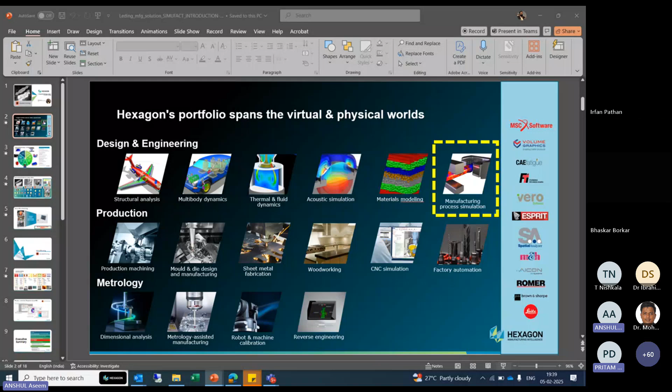I'd like to share my screen. Team, just let me know if you can see my screen. Hello, anyone from organization? We can see your screen, please continue. Okay, no issue.

Okay, perfect. So here, as I mentioned, when it comes to Hexagon, we cater to industry in multiple ways. Either it could be in terms of design and engineering solutions where we enable our industry experts in establishing virtual prototyping for different processes, like structural analysis.

We have a solution called MSC Nastran. The Nastran word came from NASA, as they predominantly use our Nastran code to simulate structural load variation and so on. Similarly, for multi-body dynamics, we have a code called Adams solution. So we provide our end users a way to evaluate multi-body dynamics situations, and for that we have a code called Adams.

Similarly, for CFD simulations, we have a code called Cradle, which is historically a Japanese solution, and now it's acquired by Hexagon. I would say the entire Japanese industry is using Cradle for their CFD applications. In India also, we have a very strong customer base where various organizations use Cradle to simulate their flow dynamics. Similarly, for acoustic simulation, like NVH parameters and all, we have a code called Actran. Users are using Actran to figure out the NVH parameters of automobiles. So industries like Tata Motors, Mahindra, or any OE are using our code to simulate the acoustic situation.

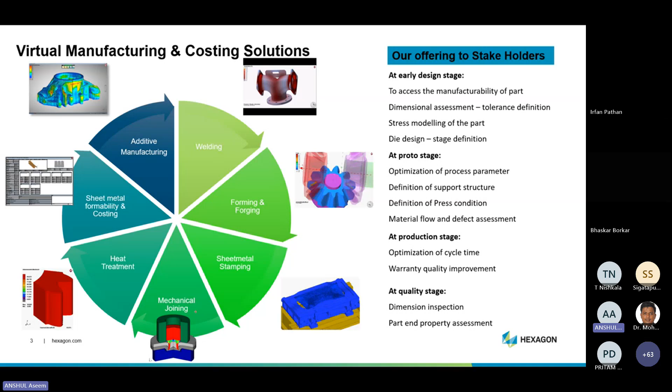So this is how it works. This is how we cater to our industry and offer support to our industry. I hope this has given a rough idea of the role of virtual simulation in this industry. So now coming back to what we offer to manufacturing experts and to the organization, can you just add those guys in?

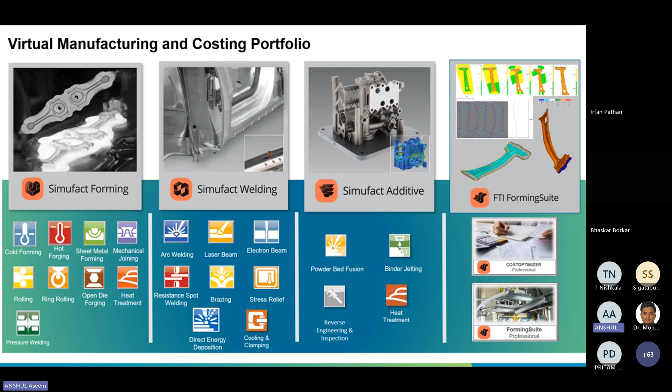This is how we align our engagements with the industry. For today's session, I will start with Simufact Additive and end with Simufact Forming. In between, if you have any queries, just let me know. So on this note, I would like to start with Simufact Additive, where we talk about solutions for the additive manufacturing industry.

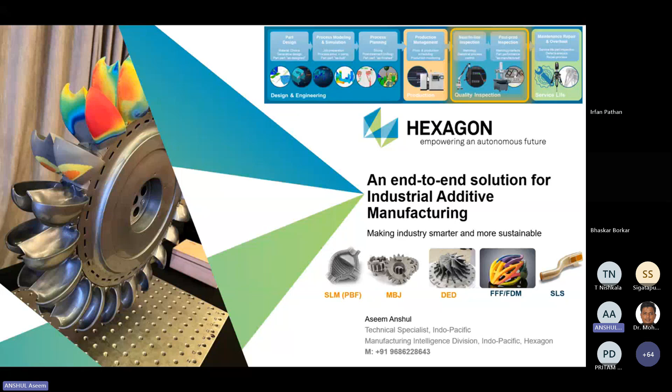For FDM and SLS, we have a solution, Digimat Additive Manufacturing, where you can get into the plastic printing process and so on. So this is how we have oriented ourselves. Now, to start with the case study of what we are doing here.

I'd like to bring a case study for Hero Motocorp, what we have engaged with those guys. So here the process starts with that at Hero Motocorp, they identified what could be a component for the additive manufacturing process. For example, they pointed out, let's print this particular component. The thought process was that this component has some X amount of weight in a vehicle when it is manufactured from a conventional manufacturing process. Could be casting, could be forging, whatsoever the process. In this case, the conventional component was casted.

Then their team worked to figure out what could be the optimum design for this particular component, which means that they ran our solution for design for additive manufacturing. They optimized the design parameters in terms of weight reduction and all those things. And once they had an idea, let's reduce the weight of this component by 50% with a particular design, with the help of additive manufacturing process simulation, they ensured that this can be printed effortlessly with the minimum of scrap.

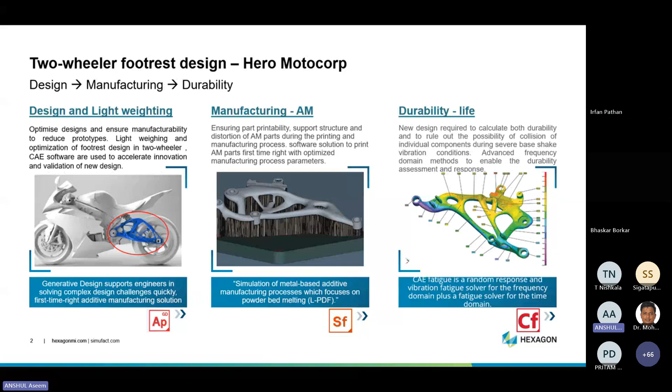So this is a wholesome story which an end user can percolate with the Hexagon solution. Either on the design side, selecting a conventional component and then optimizing the weight for that. Then moving towards the manufacturing of that particular component, what should be the ideal way to manufacture that component, and meantime, meeting the quality requirements. So this is how we work and we respond to that.

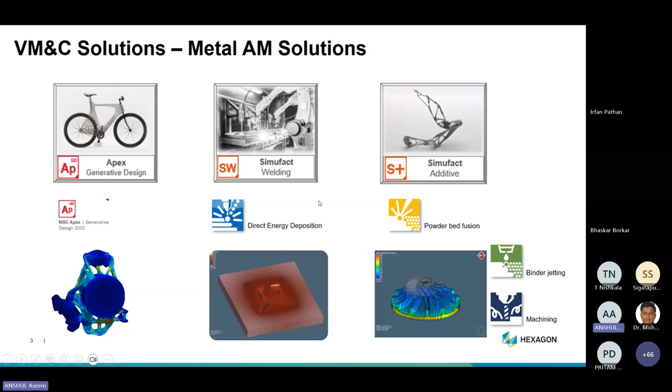So now we have different modules to study those 3 line items. One is Apex GD, generative design, which will help the end user to optimize the design of a particular component. Simufact Welding, where one can do the DED simulation, and then comes the powder bed fusion simulation. So this is something we can do. Now I will start with the generative design.

So you can see that on the right-hand side, we are going to start with a conventional component in this particular generative design software. Probably tomorrow you are working as a consultant to a particular industry. We will consider a particular component and how to start designing for that. So here Apex generative design software will help us to do a weight reduction for that.

So now you can see we are running generative design in the background, and in the software we will assign that we are looking to do a weight reduction by 50%, 60% and 70%, and depending upon the requirement for the weight reduction, the solution will provide you an alternative design concept. And now you can take this design concept, make sure what is going to be the manufacturing process for it with the printing simulation, and then finally you will ensure with manufacturing stresses whether it will sustain the required performance or not.

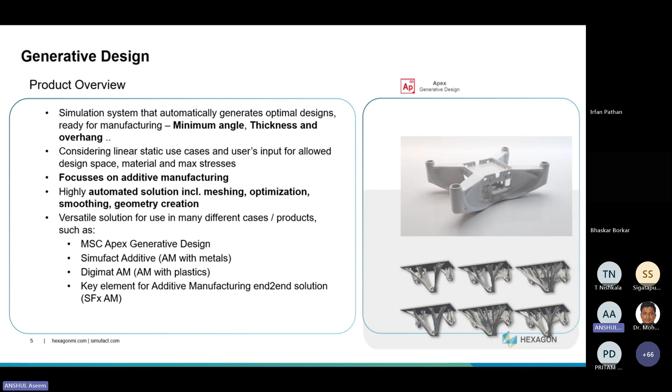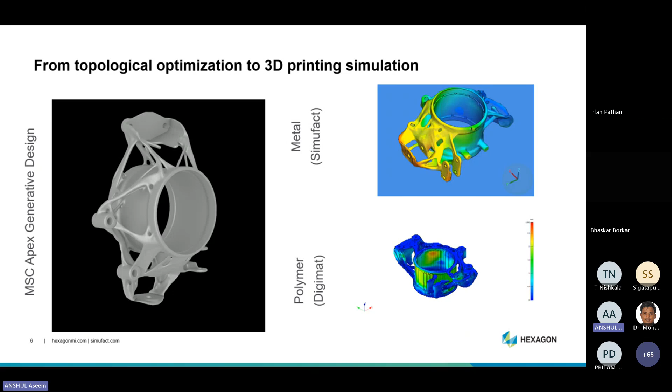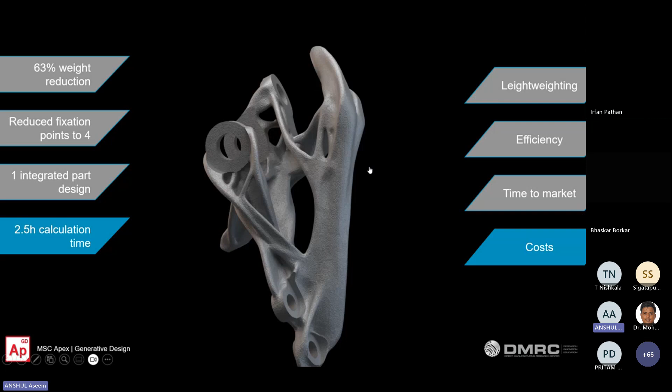So this is how we are aligned in terms of optimizing the design to the performance. Sorry for the abrupt orientation, but you can see that we are starting with a conventional design and we are ending at this particular point. Then you can simulate the process, figure out the stresses and the distortions, and then you will come with the right design, right manufacturing processes, and so on. So what we can achieve with the link-up of the solution: weight reduction, fixation points, efficiency of the printing, the cost of the printing.

Just give me a minute. My power is going off for the laptop. Just give me.

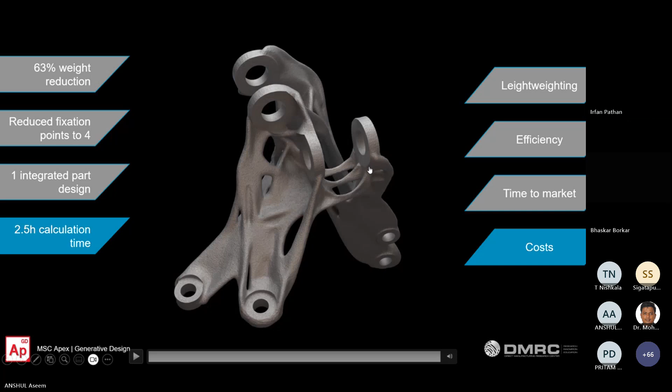So yeah, this is something which is very much exciting nowadays, and there are researchers who are going to be hired by industry in this particular line. So yes, this is all you can explore with this.

Now on the simulation side, I will start with some processes. Just give me a minute. Meantime, please feel free to drop your... yeah. So I'm resharing my screen. Okay.

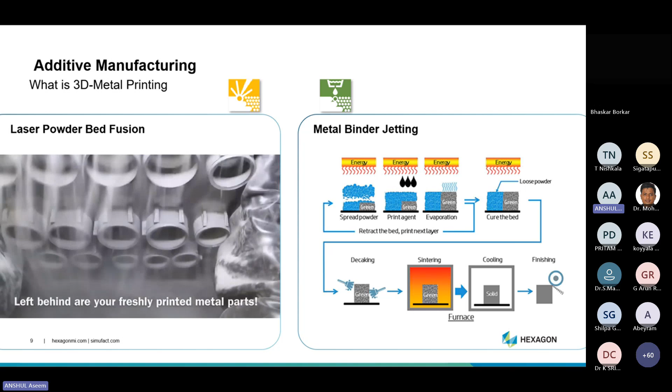So yeah, we'll start with laser powder bed fusion. So currently you can see the printing process, what we have in reality. You can see the recoater is moving with the laser, doing the printing operation. And again, the reprinting, and finally you have the components which are going to be removed. And then you can see this is the process in reality, and the same thing we replicate when it comes to the simulation.

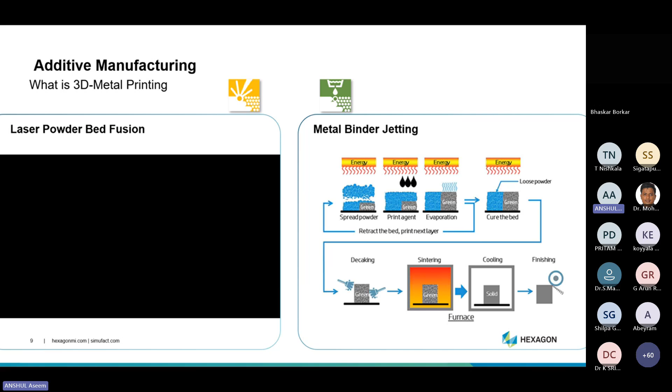Similarly, for metal binder jetting also, we have different processes. Here we have a very hot spot coming from the sintering. So what should be the sintering process parameters and all those things we need to simulate here. So yes, these are interesting workflows which can be simulated here.

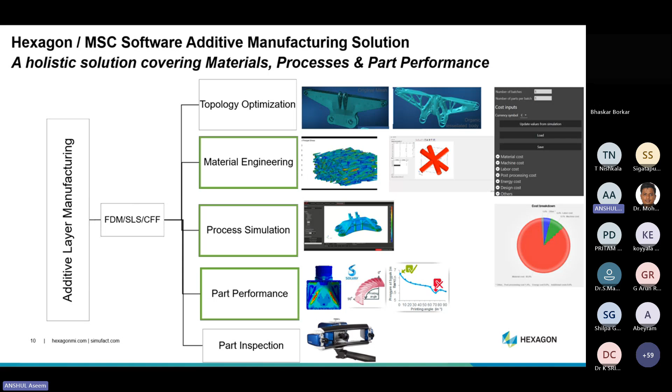So here, sorry, I was able to hear something. Any doubts? Anyone having? Okay.

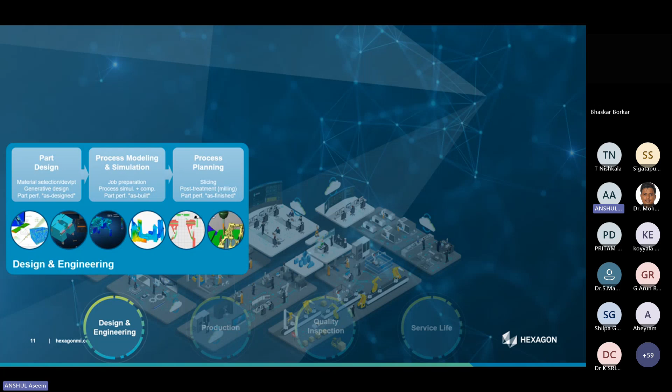Similarly, now as a user, when you move towards the next step, we are going to talk about the type of process, whether job preparation is right, whether the planning is right or not. These things we can figure out with the help of our virtual simulation from Simufact. Then as I mentioned, we have tie-ups with machine manufacturers, could be EOS, could be SLM Solutions or others. So we can connect you to the right guys and you can establish your lab and all.

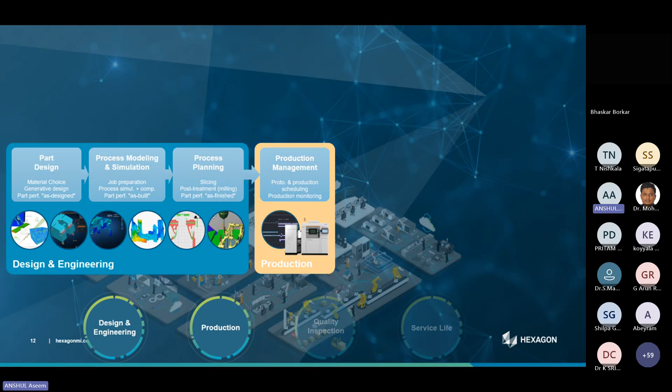Then once your real-time printing is established, it comes to the quality inspection, whether the part which is printed is right or wrong, whether it is correctly printed or not. So these things can be studied with the help of our solution. Then it comes to,

Just a minute, guys. Am I audible? Can you just confirm? Yeah, you're audible, sir. Please continue.

Okay, and then with the help of our Hexagon metrology solution, you can do such inspection and all. We can help you establish your metrology lab as well, the required CMM machines and all.

Just a minute. Actually, I'm at a public place, so you might be getting some noise from the background.

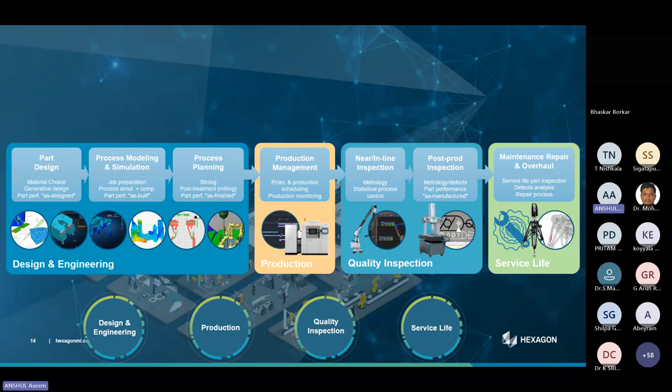Yeah. So here then comes the service life also. You can do service life analysis. We have seen CAE fatigue and all those kinds of engagements. So just to give you a rough overview of what we can do here.

So the rough overview is you can start with a conventional component and then you can work on the different candidates for the design. You can go for the performance analysis. Then you can go for the printing analysis. And again, with the manufacturing stresses, you can print the component. You can assure things and then move forward. So the point we want to highlight here for your notice is this particular part consolidation.

We are starting with this particular component and we are ending with this particular component. Just imagine the amount of weight you are going to help your team reduce, and eventually you are going to be a consumer for that component, or a vehicle. So you see that the moment you reduce the weight of the assembly, you help your organization make the vehicle more efficient, fuel efficient, with lower carbon emissions. So those objectives, what the modern-day industry is looking for, we can help them work on that particular line item. So this is the impact a simulation can bring to the manufacturing industry.

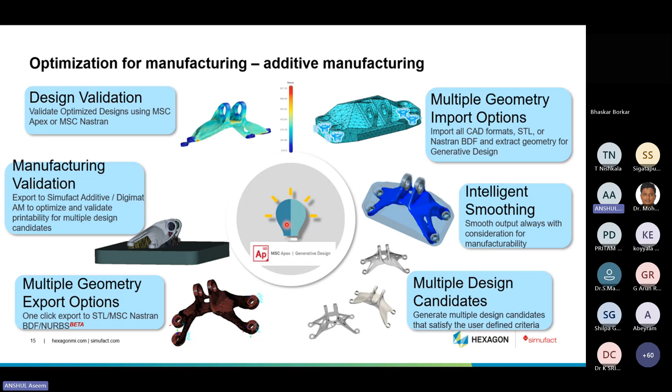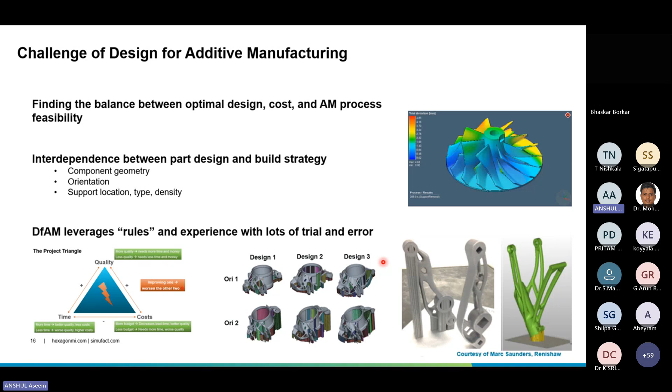So I hope you guys are through with this: the role of additive manufacturing, the role of virtual simulation, the role of DFAM, the role of simulating the candidate manufacturing process, and the fatigue properties for that. So now I'm going to bring certain case studies for your reference, starting with the printing process. You can figure out the distortion and what should be the ideal support structure. Say, for example, you can do a setting with 3 design candidates and run the simulation. You can figure out which of these 3 design candidates is going to give you the right component, either in terms of distortion or residual stresses. On the basis of those virtual runs, you can select your component.

So now I'm reaching a very interesting segment where you can help organizations figure out the problems of the printing process with the help of Simufact Additive. Till now, just to refresh you, we have discussed the role of DFAM, Design for Additive Manufacturing software, to convert a conventional component into an additive manufactured component. Now we are moving towards establishing how additive manufacturing process simulation can help our end users.

So the first thing is to establish part printability. Whether the part is going to be printed rightly or not, meaning what should be the ideal process parameters, the laser heat input, the choice of machine, the bed size, those things can be figured out on the basis of the simulation. The cost of manufacturing, time of manufacturing, the support structure, the number of components, which we call nesting in additive manufacturing terminology, the component layout, and all those things with respect to distortion and residual stress. For example, this is a coupon-based printing, and after printing, once the component was cut out, you can see the huge distortion at this particular location, which was reflected in the real-time data also. So those things we can figure out.

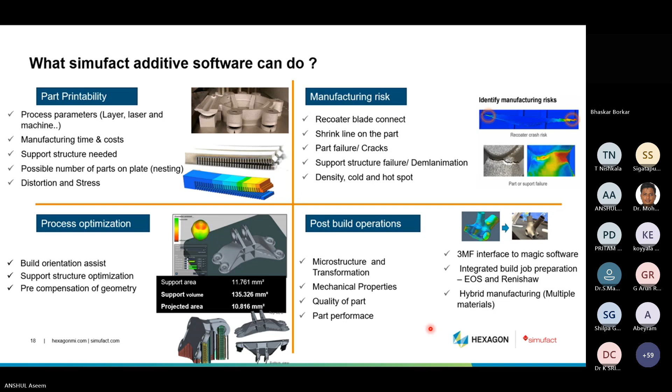Okay. Sorry. Okay. I don't know. Yeah.

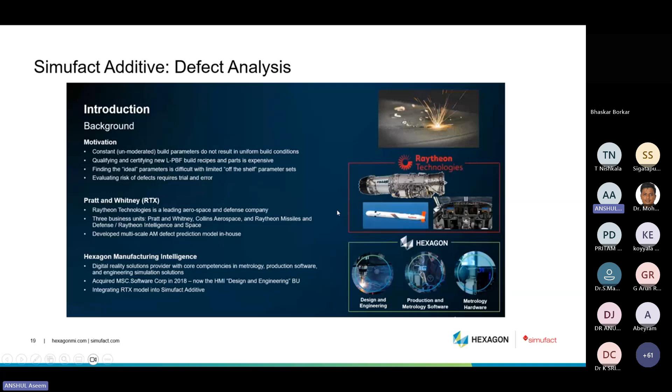So now here you can see Simufact defect analysis. We can simulate the defect analysis of the additive manufacturing process as well: the kind of fusion we are having, whether we get balling effects, the effect of excessive keyholes, and defect-free melting. These kinds of processes you can simulate with Simufact Additive. The only thing is that you need to understand what the right material is. You need to model the material, and then you can simulate these processes.

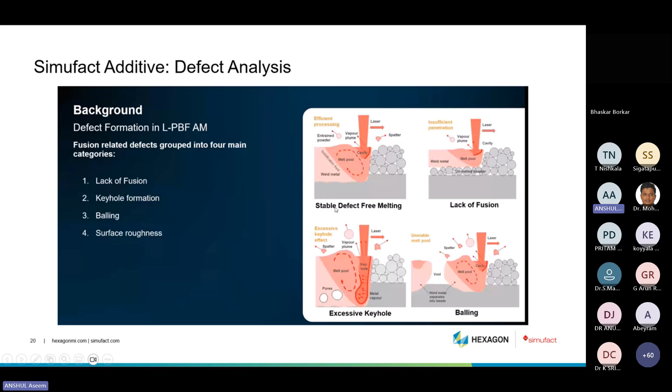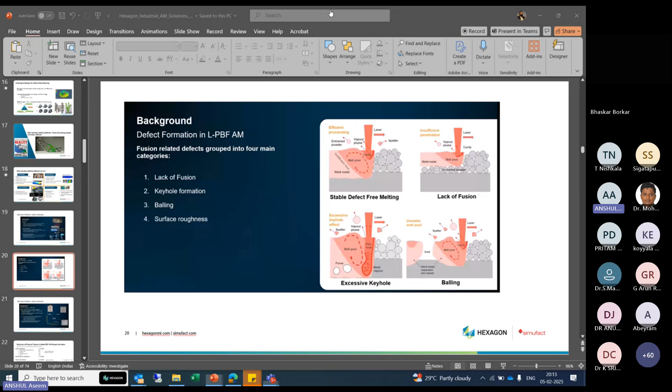So these are the beauty of simulation. At this note, I'd like to take a pause. Please do pop your queries in the chat box if you have anything on

Simufact Additive manufacturing process simulation. Just do let us know so that I can answer your questions towards the end of the session.

Now I will be moving towards the next segment where we talk about aluminum forging. Nowadays, weight reduction is a significant agenda, so we are looking to optimize the weight of a component, say for example in the automotive industry. We know that the higher the weight of the vehicle, the more fuel it requires, more carbon emission, and all those things. So industry is looking for weight reduction, and nothing can beat aluminum in terms of replacing steel, whether it's strength to weight ratio or whatever.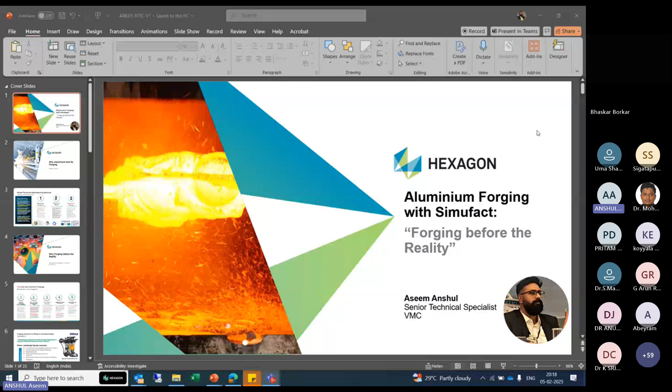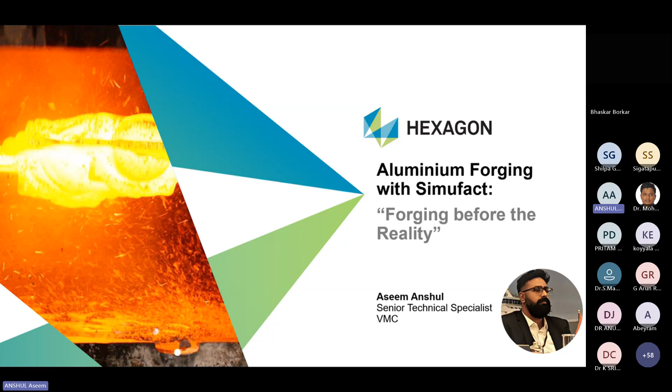So now coming to aluminum forging with Simufact, we call it forging before the reality, because before doing real-time experiments, you are going to know what will be the outcome of your process and all.

So now this is something I was discussing, why aluminum forging. We talk about the requirement of aluminum. Now demand for aluminum is shooting up like anything due to different reasons. To be honest, if we compare ourselves with the powerhouses like Americas, China, or even Europe, we are lagging behind in terms of implementing aluminum as an alternative material. On a global level, the production of aluminum is increasingly huge compared to what we do in India. So now the Indian government is also looking seriously towards that particular segment.

If we compare with China, we are on a lower side, but there are multiple data which say that the role of EV is significant in terms of promoting aluminum as an alternative material. Similarly, for solar panels, you can talk about packaging with aluminum. So these things are exciting.

Then comes aluminum as a material, what you can figure out as an alternative. We talk, yes. Then comes aluminum forging. It's very important when it comes to working on aluminum, because the forge components are too bulky, and those are the hot target when it comes to segregating what could be the right candidate to be replaced with an alternate manufacturing process, alternate design, or alternate material. So yes, the forging industry is adapting very seriously towards the new trends for aluminum forging.

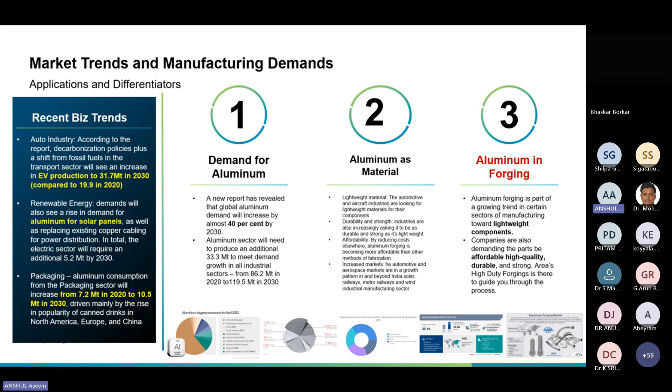So now in this segment, we are going to check why aluminum forging before the reality, why forging simulation for aluminum is quite important. When we talk about aluminum as a material, we all know the criticality for aluminum lies within its properties. The properties of aluminum are temperature sensitive, properties like thermal conductivity, melting point, and all those things.

So this makes aluminum a sensitive material when it is subjected to hot forging, because as a user we are used to managing steel. When you go to the shop floor, due to the steel properties, the shop floor is experienced in dealing with steel. But when they have to adapt aluminum as an alternative material, they are not very equipped, or their learnings are not enough to adapt aluminum for their shop floor.

So now they have to rely on virtual simulation, to see how the modeling of that aluminum is important, what will be the heat flow rate, what will be the temperature drop as a function of time, how they should manage the heat content of the aluminum for the forging operation so that they can meet the load requirement.

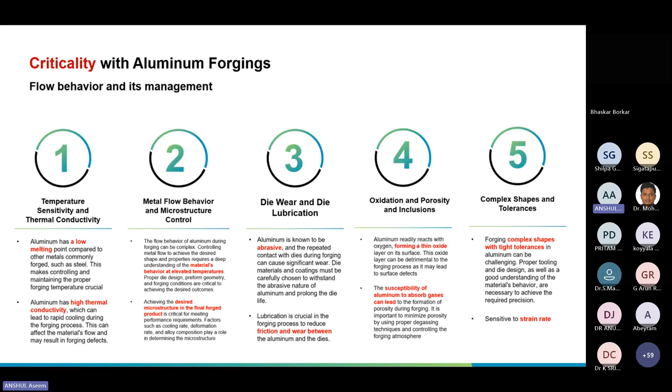You can test the flow of the aluminum. You can test the temperature, flow rate, and all those things. With the help of virtual simulation, you can meet the requirements of what will be the ideal temperature, and at what temperature we should forge to get proper fluidity in aluminum hot forging operations and all.

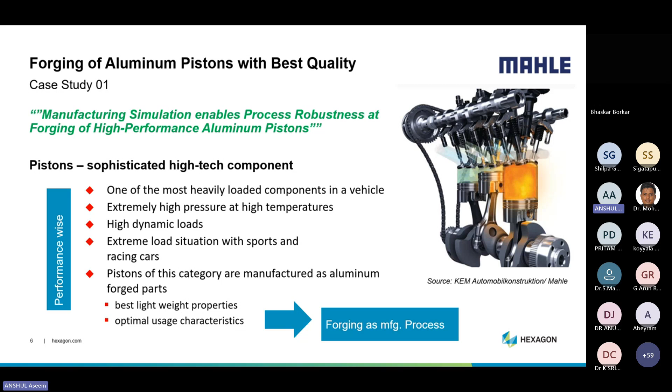So now I'm going to bring one case study coming from Mahle for the aluminum piston. As a process, these were the operations for aluminum, like the challenges we have.

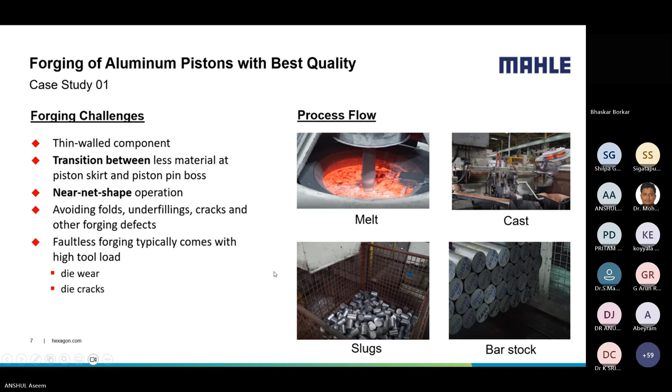So now when it comes to simulating the process, we start by creating material data. We have a library—the user can select a material from the library, defining the press parameters, like the choice of press, whether it should be the clutch press and all those things.

Then comes the tool data, like what should be the die and those things. Then you can model this as a process.

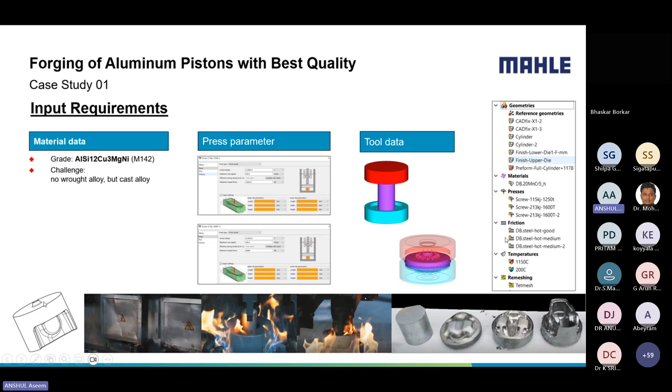Then you simulate this flow—the material flow, the force requirements, the crack formation, whether we are going to have a crack or not, tool analysis, what will be the tool life, and then the microstructure. So in a rough note, these are the outcomes we can derive through the simulation.

So now what is going to be the material flow? It is going to be governed by the flow defects, mold filling rates, and the geometry. Similarly, the forces and movements can be established based on the selection and choice of the machine.

Then comes the freedom from cracks—the crack assessment and all those things we can figure out. Then comes the tool analysis, what will be the tool life and all those things. And then comes the microstructure, like grain size, phase proportion, and all those things can be figured out.

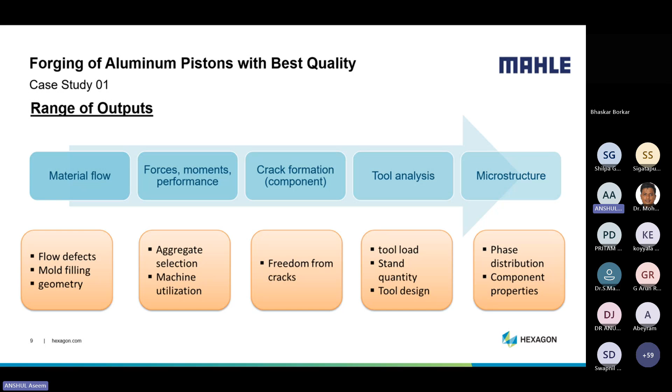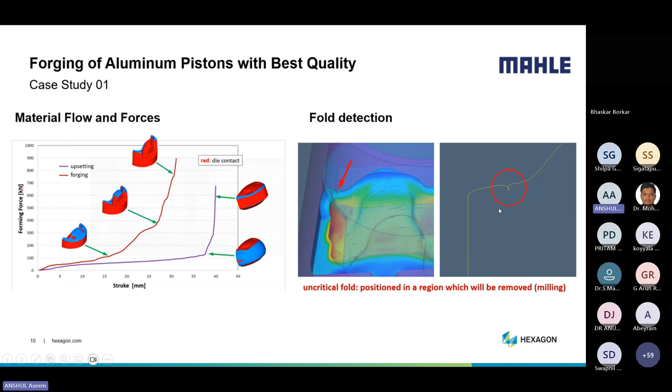Then comes fold detection and all—you can simulate for fold detection. Here you can see, with the help of simulation, you can figure out the hottest spots where you will have the fold and all.

Sorry, just a minute. Just give me a minute.

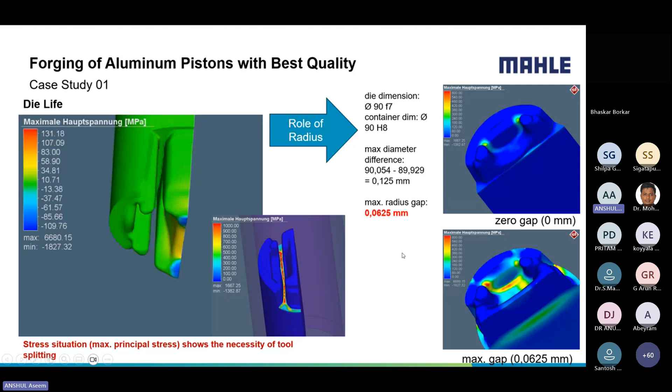So you can figure out the deflection in the dies and all those things. We can make out with the help of these virtual simulations. You can figure out the hottest spot where a die could be susceptible towards cracking, considering the load, extra load, what we are getting on the dies. So yes, these are the studies we can perform here, from the die life to the die load to the material filling and all. So those things we can figure out with this.

Now, why do we need virtual simulation with Simufact? There are key differentiators when it comes to Simufact. In Simufact, we have a finite volume kind of approach to model out the hot forging process. So as a user, one can simulate for the finite volume process, and you can figure out how material is flowing. You can see the mesh pattern for the volumetric analysis and all those things.

In Simufact, you can figure out the fatigue life of the component and all. So that can help you in terms of assessing that.

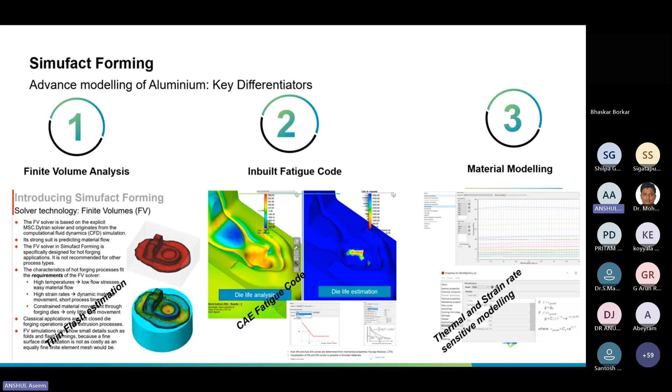Then comes the material modeling. We have a very rich library where the user need not invest their time to build a material like in other solutions. So as a user, you can select a material either for the additive manufacturing process, or for the welding process, or for the forging operations. You can select a material and run the simulation with your material. So here for each material, we capture the temperature dependent properties, we capture the mechanical properties, and that really helps us to model out the particular process.

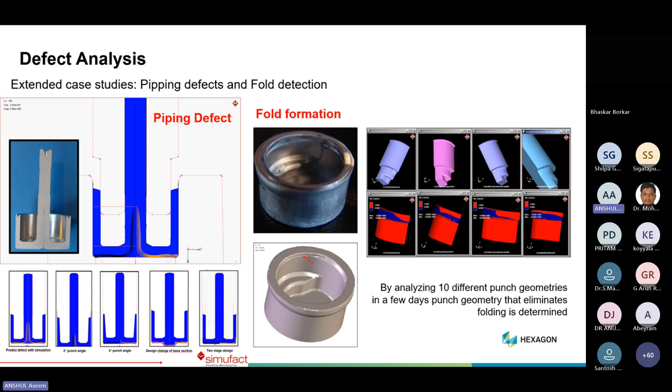Now, the same thing can be assessed with fold formation, fold assessment and all. So we can again implement simulation to figure out what will be the role of simulation in terms of estimating the fold and all.

Now you can see the real-time examples where there were folds in the real-time samples. And when it went into a simulation, you can see a mesh view of that particular component, where you can assess the fold and all.

So these things are very, very important when it comes to aluminum forging, because as I mentioned, there is no ready-made data available for the shop floor guys to troubleshoot these issues. And there the simulation and the new experts come into play, and then they can provide the solution for the industry in a first-time-right kind of manner.

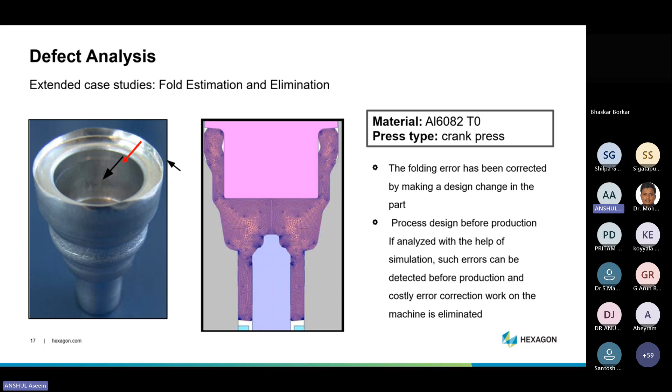Now, at this note, I'm going to converse to a point where conventional processes and additive manufacturing are coming onto a single platform. In the beginning, we talked about additive manufacturing, and now when we talk about the forging process, nowadays we are talking about bringing out punches for the forging process with a new design, where we talk about cooling channels to maintain the temperature of the forging punches at a particular level.

And there, these simulations with Simufact for the forging process and additive manufacturing process can help the end user. So as an end user, you can simulate for the stresses coming out of the additive manufacturing process.

You can use those punches to do a forging operation and figure out what will be the life improvement for these newly conceptualized punches through an additive manufacturing route rather than going with the conventional casting punches. So these are certain benefits we can derive through this, and now you can work on that.

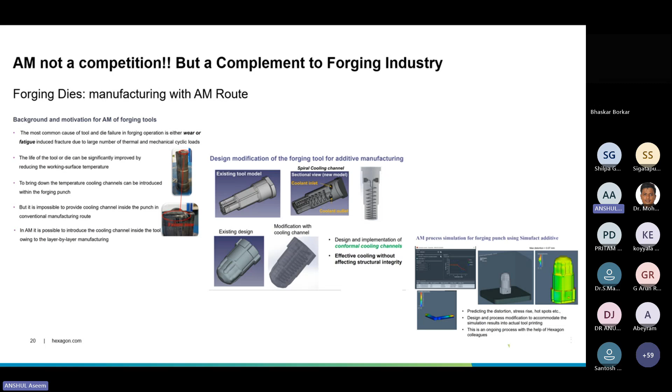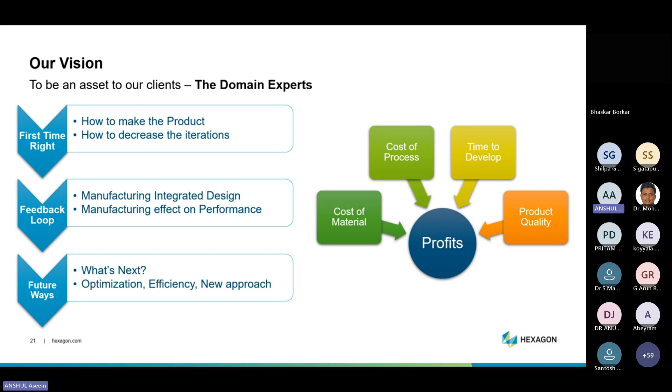So yes, this is something industry can eventually receive from simulation of the process. They can save cost of the material, they can save the cost of the process, they can save time to develop that particular component, and in the meantime they can enhance the quality of the product as well. So this is something one can receive as an end user.